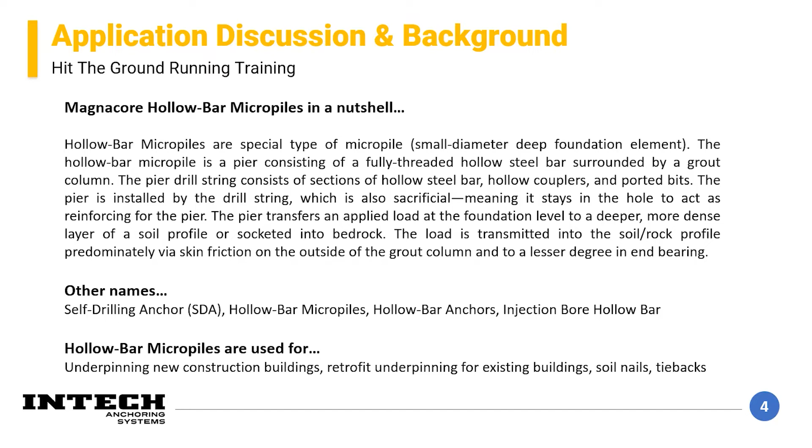The thing that is unique about hollow bar micropiles is the one-pass installation method, where the hollow steel tube used to drill the hole for the micropile is disconnected from the drill string and remains in place as the element reinforcement. Other names for hollow bar micropiles are self-drilling anchor, injection bore hollow bar, and hollow bar anchors.

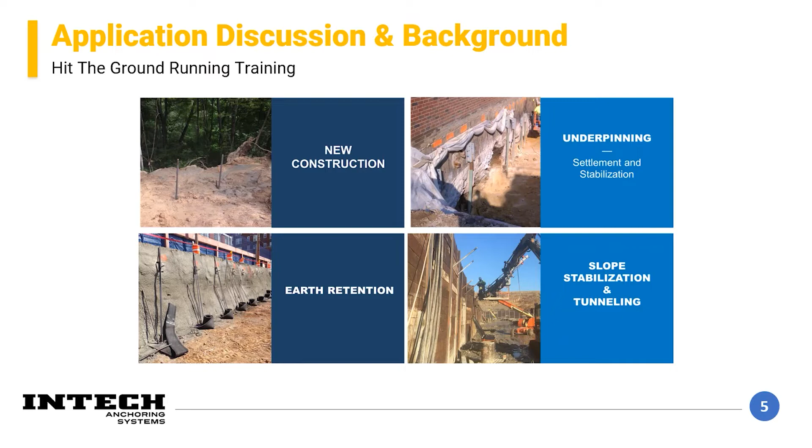Hollow bar is used in a number of applications such as new construction, retrofit, earth retention and slope stabilization, and tunneling. Some of the biggest advantages of using hollow bar in a project are when there are difficult soil conditions like collapsible soils that don't allow for open hole drilling.

This is because the method of installation is able to maintain a grout head which resists hole collapse. An additional benefit of the system is the ability to hammer the drill string through tough cobbles and gravels, and it's even able to penetrate to create a rock socket into bedrock.

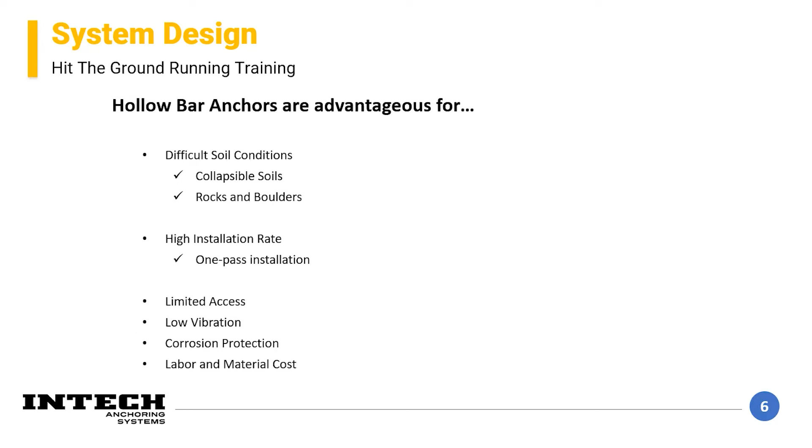Finally, the system is relatively low vibration, has options for limited access, and is able to have galvanization and other methods of corrosion protection applied. The final benefit of the system is the labor and material cost.

This is compared to a conventional micropile installation. There are several methods of micropile installation that exist, a few of which include advancing casing ahead of the hammer to keep the pile cavity from collapsing.

In these scenarios, you advance the casing, drill a little bit, add more casing, drill a little bit more, and so on until you get to the end of the hole. So it takes quite a bit of time, effort, and labor to install a conventional micropile with this method.

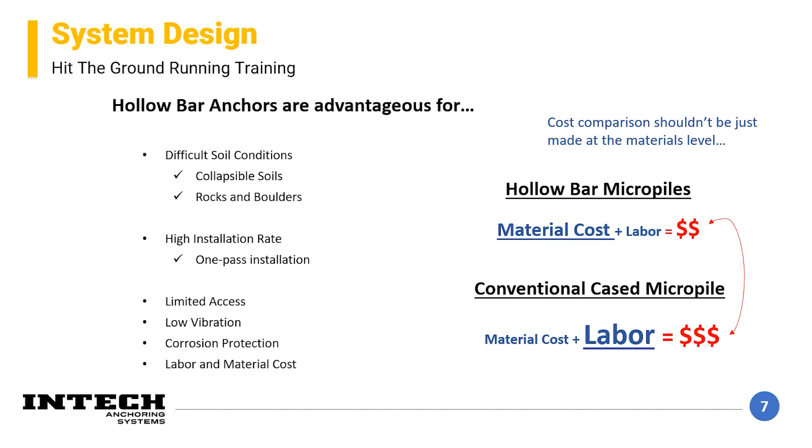Whereas for our method of hollow bar installation, the material for reinforcing costs a little bit more, but the savings can be realized in the significantly less labor required to get it installed. The one-pass method is significantly faster, allowing for more piles being installed on a site.

System components and options. This is a breakdown of the individual pieces of a finished hollow bar micropile element. The first breakout includes the hex nuts and termination plate, the final injection grout, coupler, and drill bit.

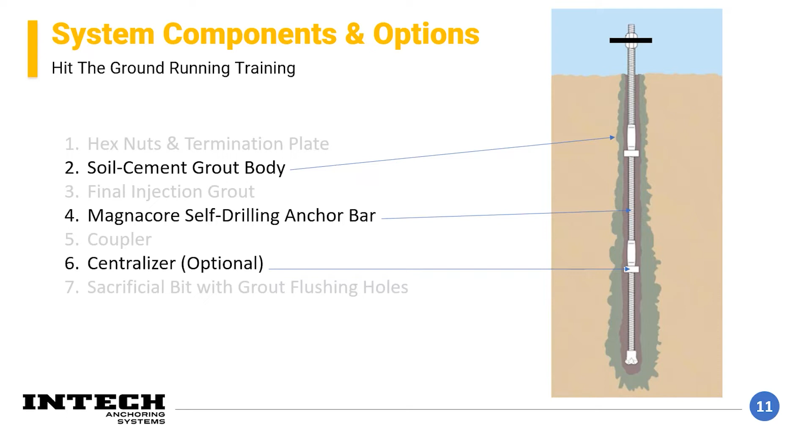The second breakout includes the soil cement grout body, the hollow bar tube sections, and centralizers which hold the bar in the center of the cavity.

So a little bit more about the bar. The bar is continuously threaded steel tube. The threads are typically left-handed threaded. The bar is usually shipped in 3-meter sections, but this can be cut into smaller sections for low headroom type installation. MagnaCore is regularly tested for the cross-sectional area, thickness, tensile strength, and yield strength.

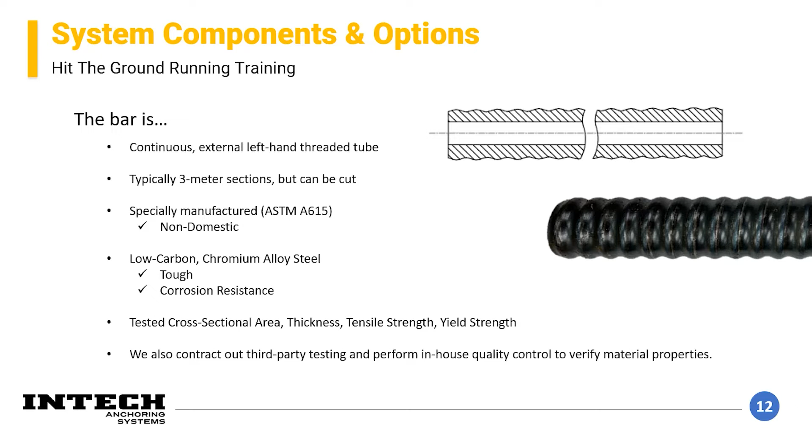We also contract out third-party testing to make sure that what you get on site is good or better than what you order. There are typically two styles of hollow bar, namely T-thread and R-thread. R-thread stands for rope thread, and T-thread stands for trapezoidal thread. These designations describe the outer profile of the thread.

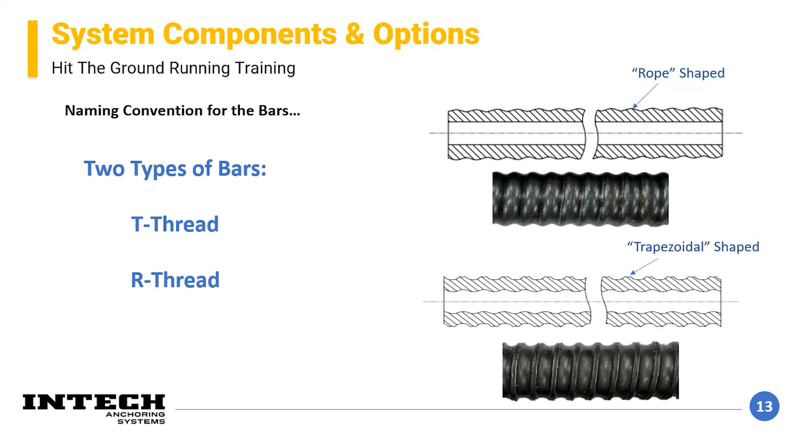So this is how the naming convention breaks down. For example, for the name R32S, it has 3 parts. The first part is the letter designation of the bar, so rope or trapezoidal thread. It will have either a T or an R here.

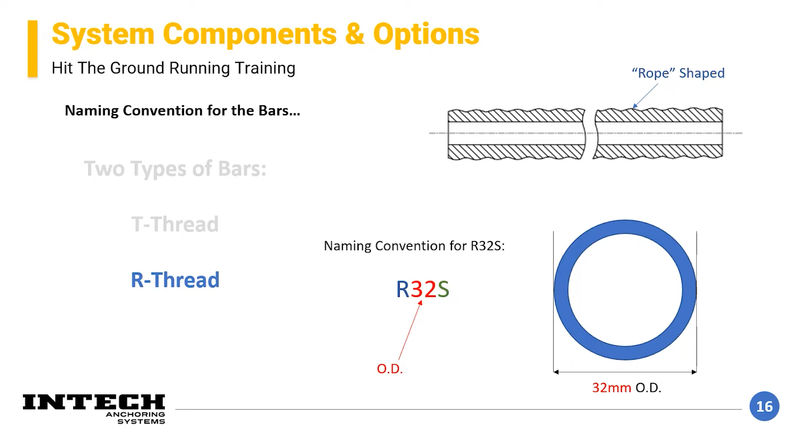The second part of the name will be the outside diameter of the bar in millimeters, so in this case it is a 32 millimeter outside diameter bar. The third part is the hole modifier, which refers to the hole size. The R-thread naming conventions we currently carry are R32, R38, and R51.

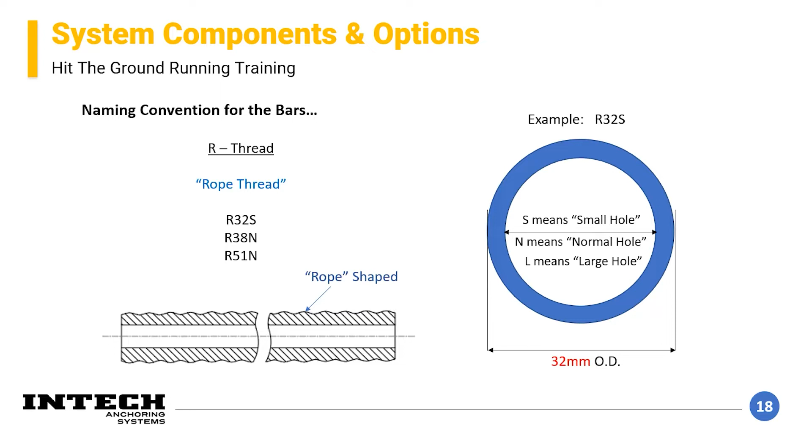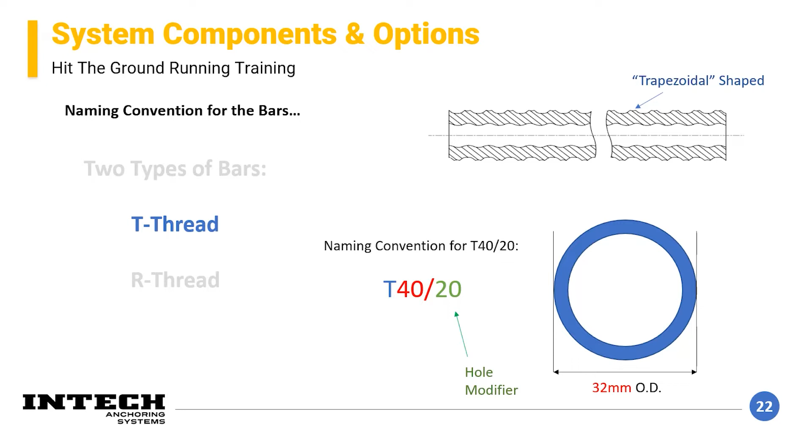In this case, it's a 20 millimeter inside diameter. These are the current variations of T-thread bar we currently carry. Note the hole modifier for this style is denoted as the inside diameter of the hole.

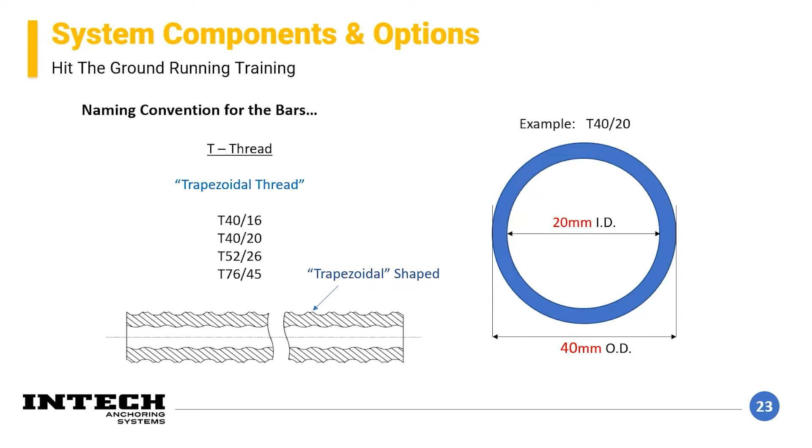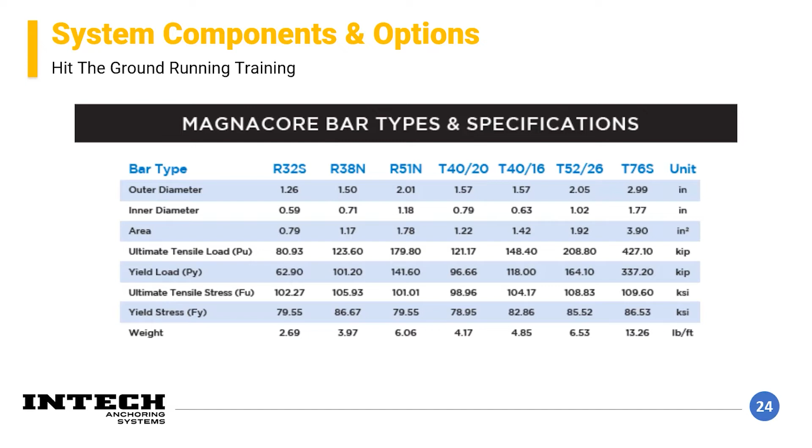At the end of the day, it is most important to consider the specific engineering properties of the bars from the specific supplier you are getting them from. We generally have the strongest bars in each line in the market, so make sure you consider a smaller bar size compared to our competitors. For instance, it is not uncommon that our R38 bar can outperform T40 bars from other suppliers.

So the next component we're going to talk about is the couplers. These are internally threaded sections of tube that connect consecutive sections of bar. There are also gaskets on the inside that engage with the end of the bar to seal the internal hollow section of the coupler. This is to keep the grout fluids from going between the threads and squirting onto the installation crew during pile advancement.

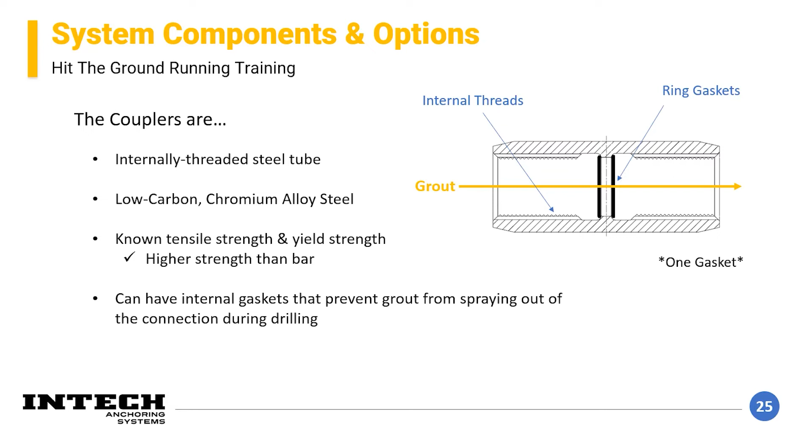The coupler sections are designed and tested to verify they are higher strength than the bar itself. The third component to go over is the bit. The bits are heavy steel components that get threaded onto the end of the bar. There are multiple styles of bits that can be selected based on the anticipated soil conditions.

The first one at the top is the button bit. This bit is good for pulverizing bedrock for rock sockets of substantial length. The second style that we typically carry is the crosscut bit, which is good for dense or stiff profiles and even some moderate rock socket lengths.

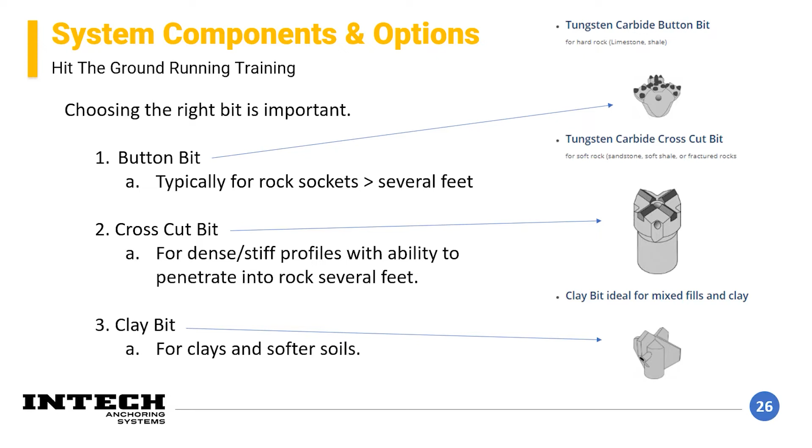The last style we carry is the clay bit, which is good for clays and softer soils that don't have gravels or sands. There are other types of options that we can obtain, so if there's a specific style that you're familiar with that you would prefer, please feel free to let us know.

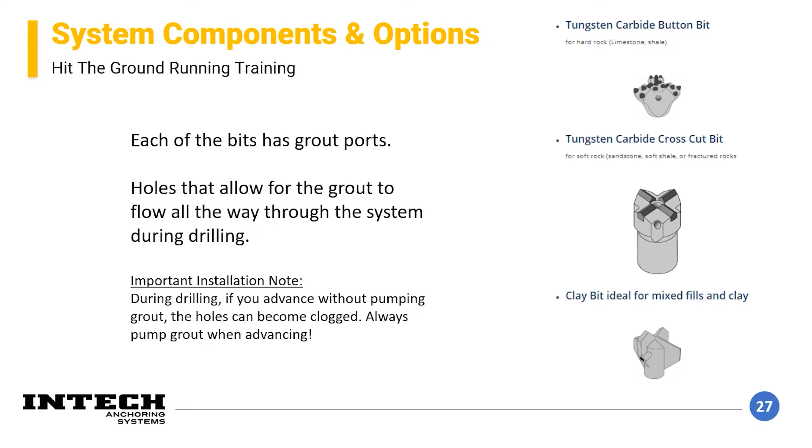It is important to understand that each of the styles of bit have ports to allow for grout to flow through them. This is an important key to installation, that you always have to be flowing fluid through the bit during advancement, otherwise the bit can plug up. Always remember to flow before you go.

The termination assembly consists of a few pieces and is the last component we're going to discuss. It consists of a bearing plate with a hole and a few hex nuts. These plates are designed to be large enough to structurally transfer the project loads with the pile cap. Once the design length of the pile has been achieved, the nuts and plates are assembled and any excess bars cut off. This assembly is then typically cast into a footing or pile cap.

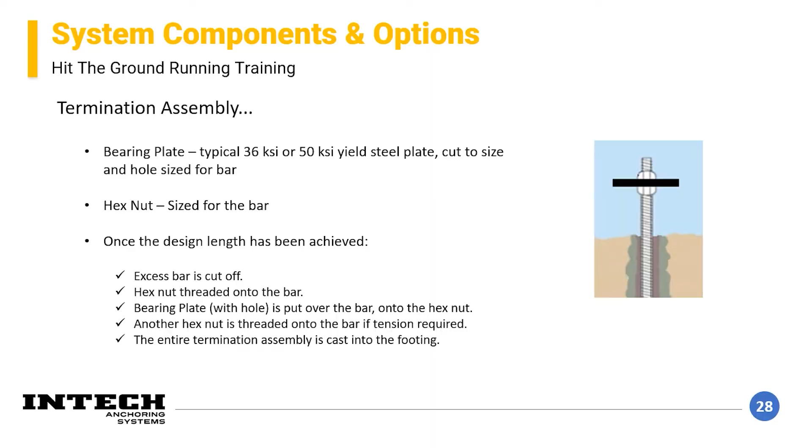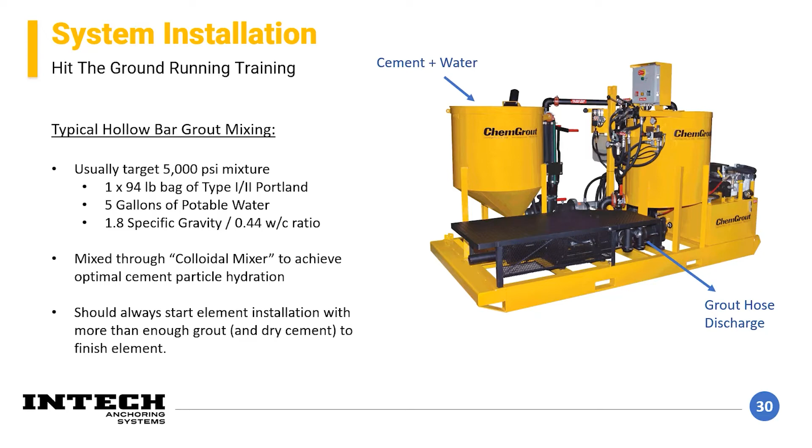System installation. Another necessary component for system installation is a grout plant. This system takes cement particles and water, combines them very intensely using the colloidal mixer, and pumps the grout through the system all the way down to the bit. An important key is to make sure that you always have enough cement to finish an element. You don't want to be going to the store for extra cement with wet grout in the tanks.

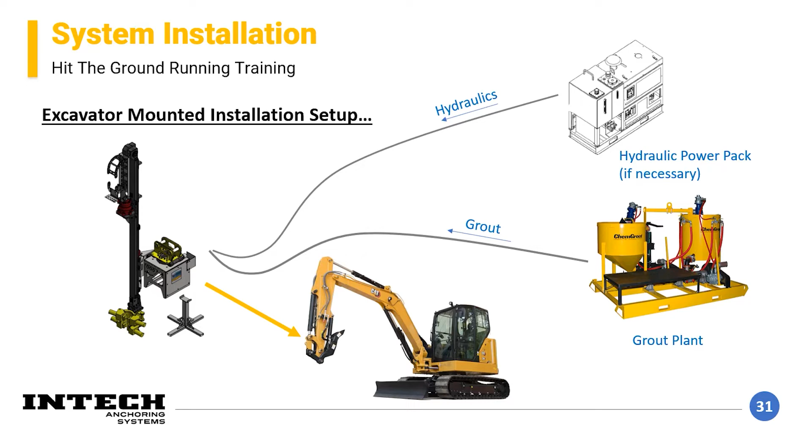As an overview of the system setup, I wanted to show this diagram of the moving pieces in the system. This slide specifically demonstrates how the pieces go together for an excavator-mounted installation setup. The drill runs off of hydraulics, so it can either be run off the excavator if the excavator has sufficient pressure and flow to meet the needs of the drill. Otherwise, an external power pack can be used as a supplement to smaller equipment or equipment that doesn't have hydraulics capabilities.

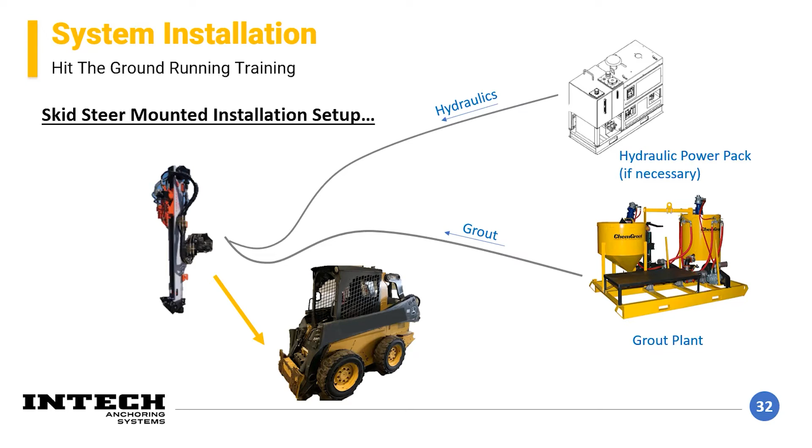The second setup is for a skid steer mounted setup. Similar to before, these can be run off smaller pieces of equipment, but if you need extra pressure and flow, a hydraulic power pack can also be used. And finally, we also have a man-portable drill system that can be moved by hand. There are some limits to the bar this one can install, and the specific drill specs should be checked.

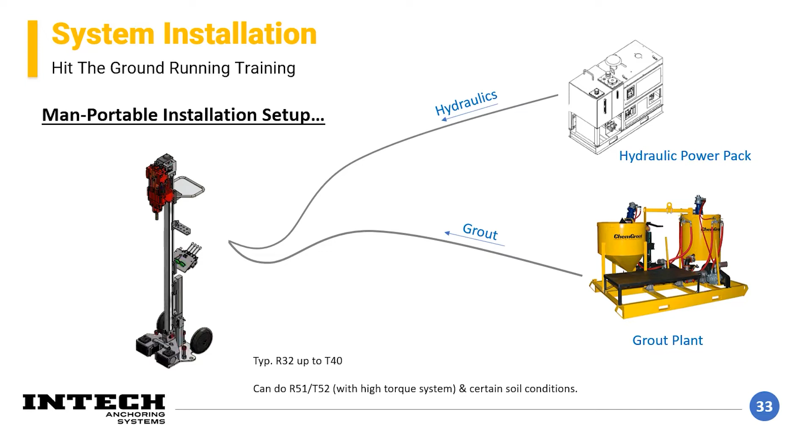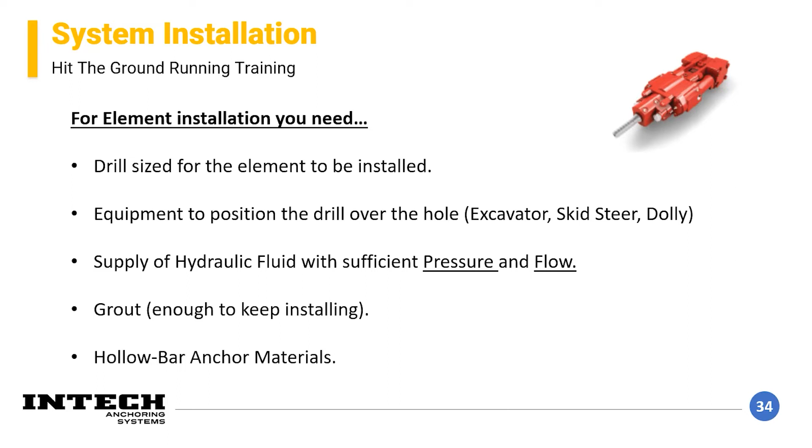This is a breakdown of everything you'd need for element installation. You need a drill size for the element to be installed, equipment to position the drill over the hole such as an excavator, skid steer, or dolly, a supply of hydraulic fluid with sufficient pressure and flow, grout, and hollow bar anchor materials. There are a few major components that are included on each drill that should be noted.

The first is the place the grout goes through the drill. Ultimately, the grout will need to go through the hollow tube of the hollow bar, so the grout hose will connect to the drill in some place that allows it to flow out of the striker bar.

The second item are the grease ports that allow for lubrication of the drill. The third item is the striker bar, which allows the drill to connect to the hollow bar.

You can either use a shank that has the thread pattern of the bar you are installing, or use an adapter. It should be noted that using an adapter for a hole size that is very large compared to the bar can lead to issues during installation.

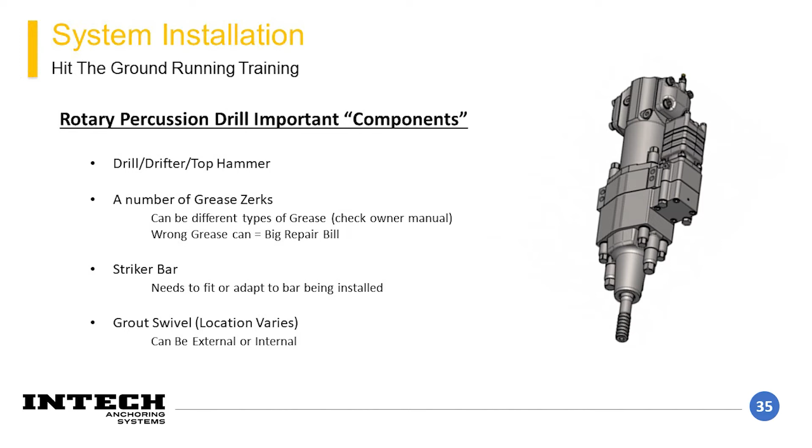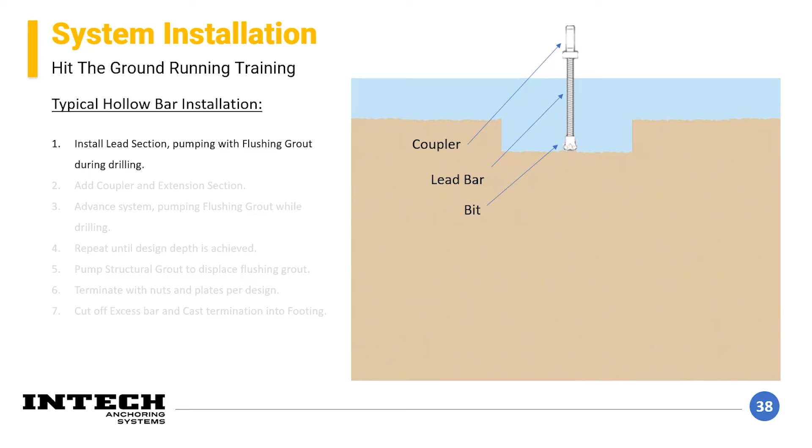These slides will demonstrate the general steps for element installation. The first step is to install the lead section, which consists of a bit, the first section of bar, and a coupler to attach to the drill. For clarity, I have omitted the drill above.

So the first step to advancing is to start pumping grout. While you're pumping grout, you apply crowd and torque. It is also possible to use a thinner grout than the design mix.

We call this the flushing grout. It can go as thin as water, but less cement results in less fluid density, which can cause hole collapse. We will also have to displace this grout at the end of the element installation.

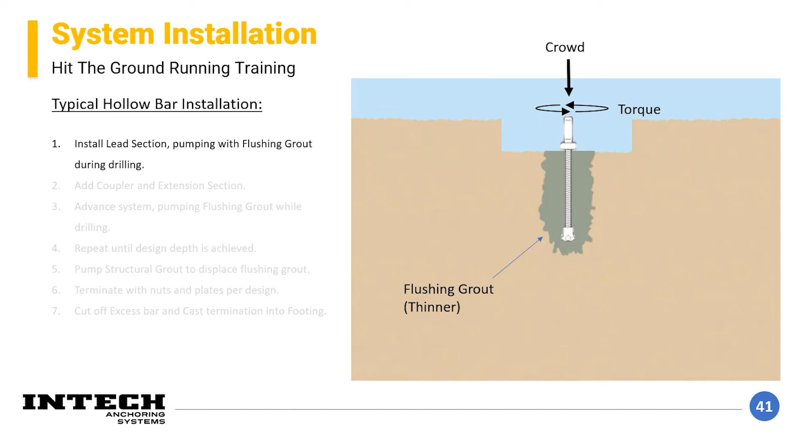So when you're drilling, someone should always be looking to verify that grout is flowing out of the hole. If there's no grout return, it's important to assess the reason.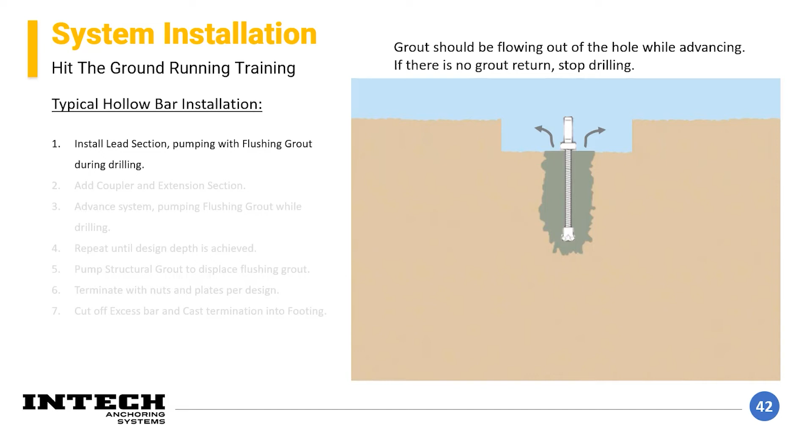Another thing to note, the hole created by the system is taken to be the diameter of the bit. Since we're pumping under pressure, the grout flows into the void space of the soils. This is especially advantageous in sands and results in much higher engagement with the soils.

After each section of bar is advanced nearly all the way into the ground, it is good practice to plunge the hole 3 to 5 times. We've been on projects where the contractor didn't do this, and it resulted in poor pile performance.

So after you're done plunging, you can disconnect the coupler and add another bar section. You can then advance the system, making sure to pump grout before advancing the steel.

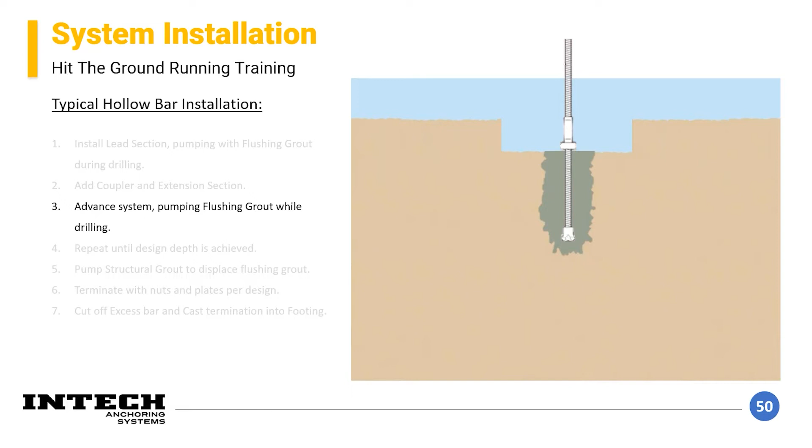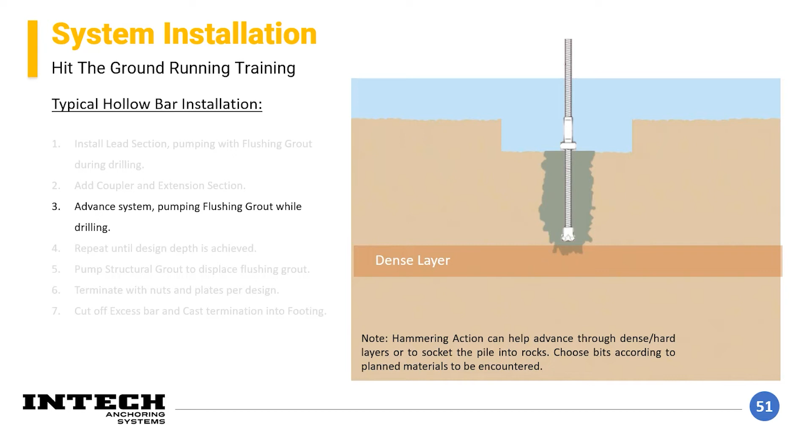Another feature of hollow bar drills is they're able to apply a hammering action. This action can help penetrate dense, cobbly, gravelly soils, and also penetrate into bedrock. The vibration helps advance the pile through this dense layer.

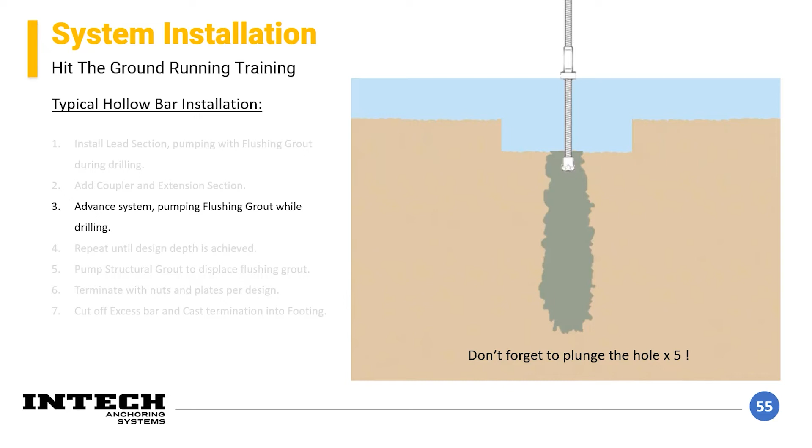Also, don't forget to plunge the hole. So now you just repeat this process until your design depth is achieved.

At this point, we'll say that we achieved our design depth. The hole that has been created is full of thinner flushing grout, so it is necessary to displace this material with structural grout. If the hole was drilled with structural grout the entire way, this step isn't necessary.

You can see here the structural grout has filled in the cavity of the hole, which is the diameter of the bit. At this point, it is necessary to plunge the hole just as before.

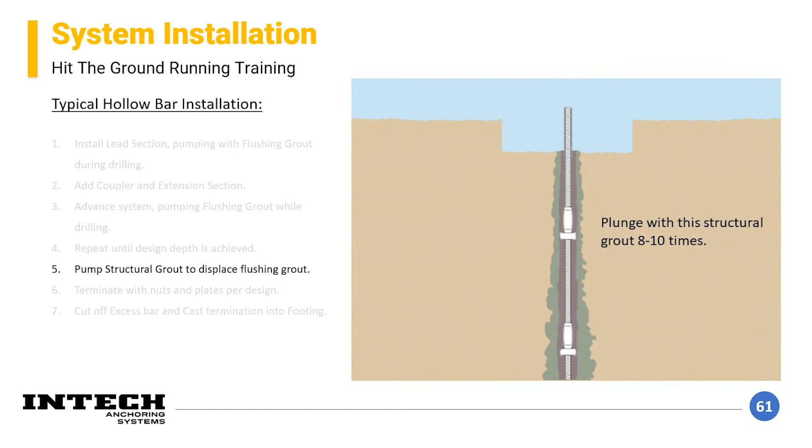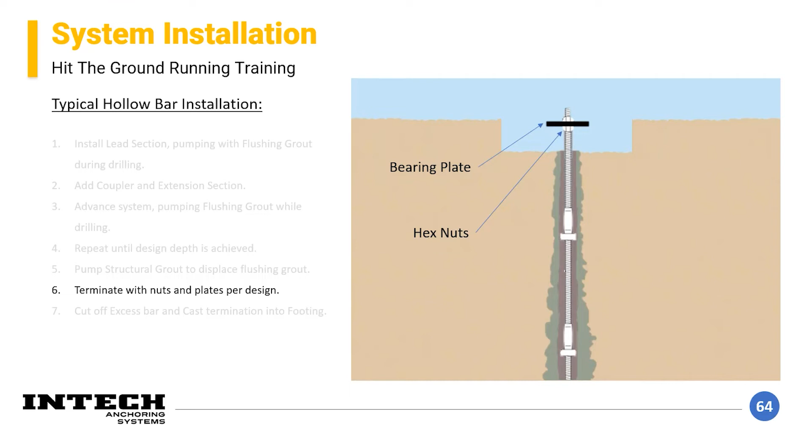Now add the termination components per the design. The designer of the pile cap will designate the elevation the plate should be at. The nut should allow for ease of adjustability of the plate. Finally, the termination gets cast into the pile cap.

So with geostructural solutions, there's a few things to consider. First, I'll go through the major principles for the geotechnical capacity. The geotechnical capacity is comprised of two things: the skin friction and end bearing.

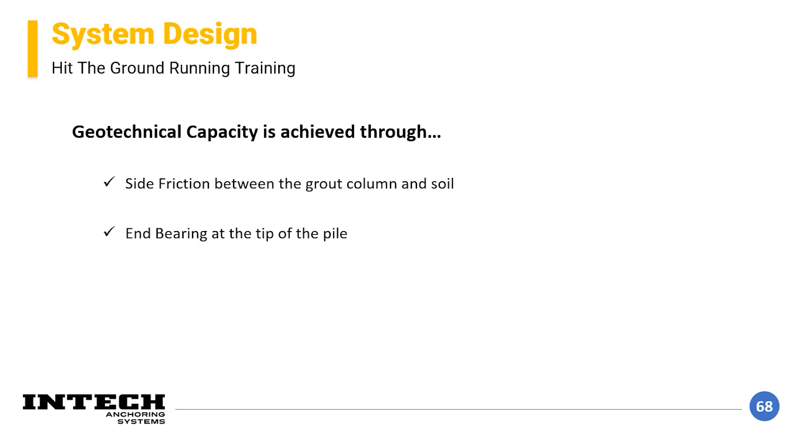The skin friction, or side friction, is generally taken to be the surface area of the sides of the grout column diameter. So we would take this area, which is a function of the diameter of the bit, and multiply that by the bond strength.

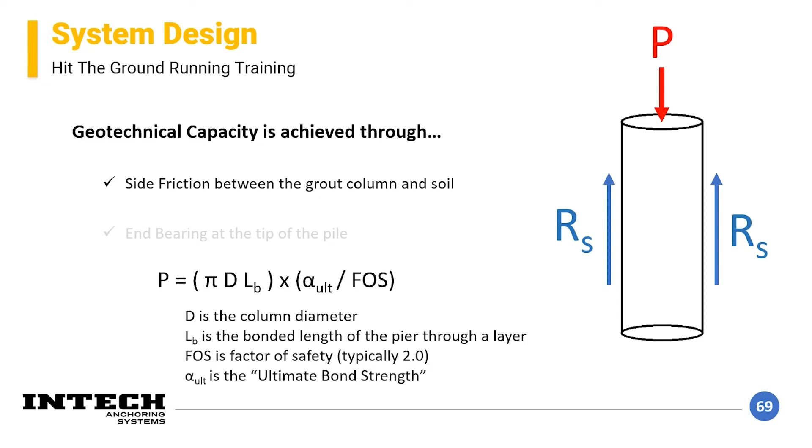There's also a factor of safety applied to this bond strength, so it can be compared to a design load. This area times the strength results in a resisting load capacity.

So with geotechnical systems, there are typically a few layers of soils and/or rock. Each of these layers has a section of cylindrical area that passes through them.

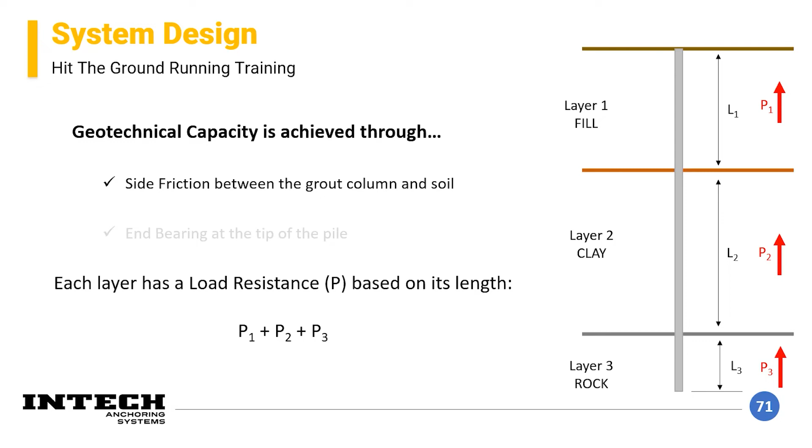It is intuitive that the density or stiffness of various soils results in varying amounts of resistance friction. For example, a soft clay probably won't resist a load as much as intact limestone. So with that friction resistance equation before, and knowing how much cylinder passes through each zone, we can calculate how much skin friction capacity can be counted on for each layer.

An important note, there is typically a length we disregard at the top for undocumented fills, active zones for wet and dry conditions, and other cases of soils that shouldn't be counted on for resistance. The design methodologies listed before typically have a more in-depth description of what to use for an unbonded length.

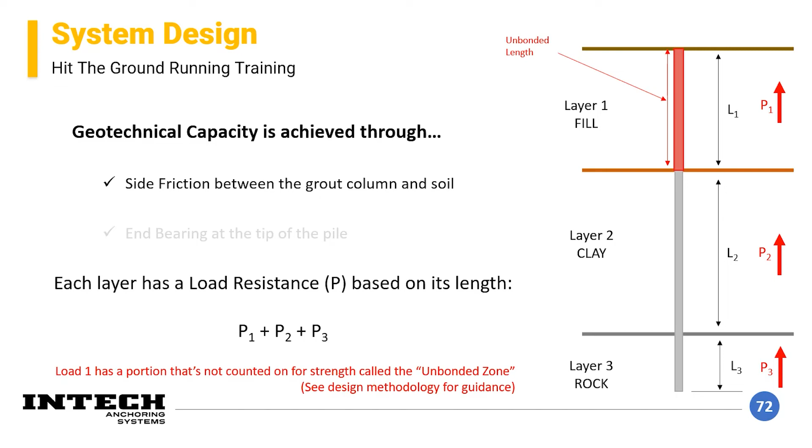So the check we do on the system is to determine if the capacities of each layer are greater than the applied load. If there is more capacity than load, the system is okay. If there is not enough resistance, the length of the pile or the diameter should be increased, or even the number of piers can be increased to decrease the total amount of load on each element in a system.

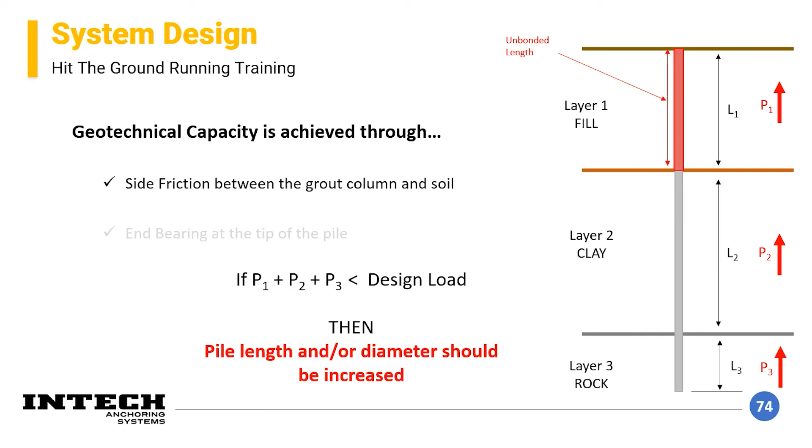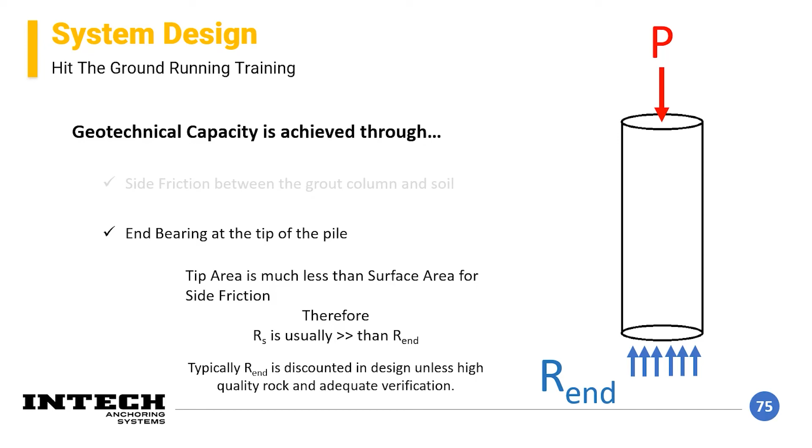So another type of geotechnical capacity that can be used is the end-bearing capacity. However, as these elements are relatively narrow in the context of geotechnical engineering, this is typically disregarded unless it is in bedrock, and the bedrock is quality rock that has been cored and tested.

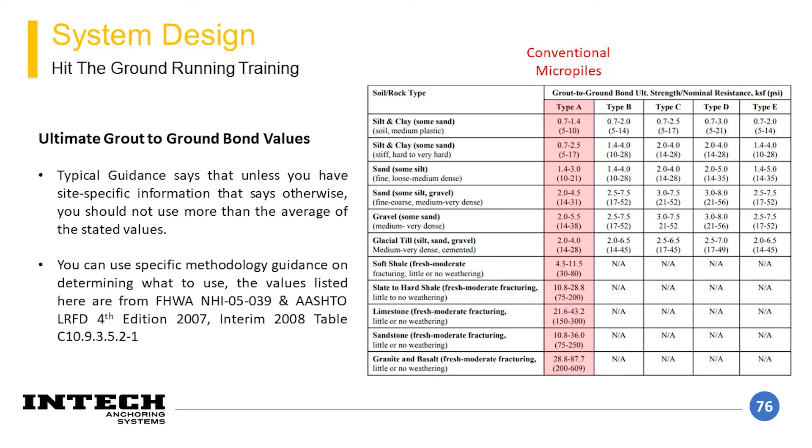These values are what we typically use for the ultimate grout-to-ground bond for the soil. A conventional gravity grout system is type A. A hollow bar system, type E, can be seen to achieve higher values of bond strength based on being installed with pressurized grout.

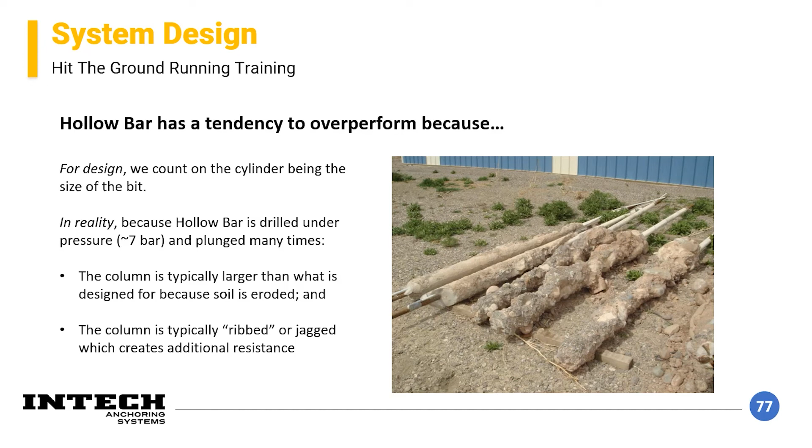As you can see here, on the left are some elements that were installed as solid bar. These elements are smooth-sided. Then the next 3 on the right are hollow bar elements. Based on the pressurized grout and plunging, it creates a very ribbed profile of the grout, which allows for more surface area. In this manner, our elements typically perform better than what we initially design.

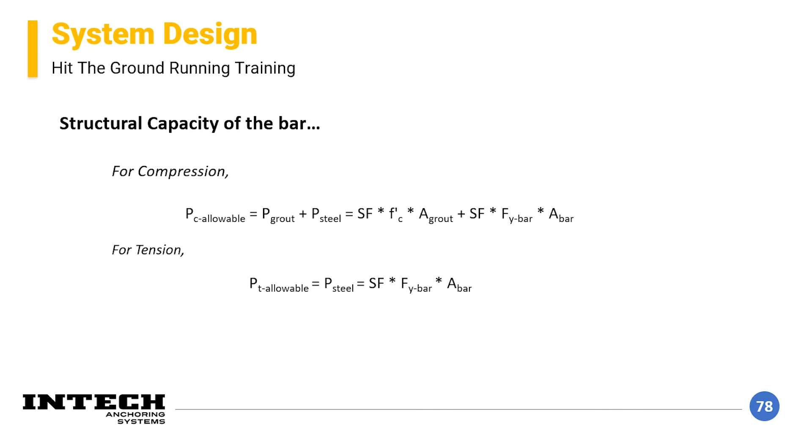So these sets of equations represent the structural checks we do for an applied load. These checks are compression and tension. As you can see, for a compression load, the capacity is shared by both the grout and the steel. For tension, however, the only term that is used for supporting the loads is the steel, so the steel is the limiting component for structural support in tension. This is because concrete doesn't do very well in tension.

And if any microcracks were to form, the grout would become disengaged at that point. The only thing transferring the loads is the steel.

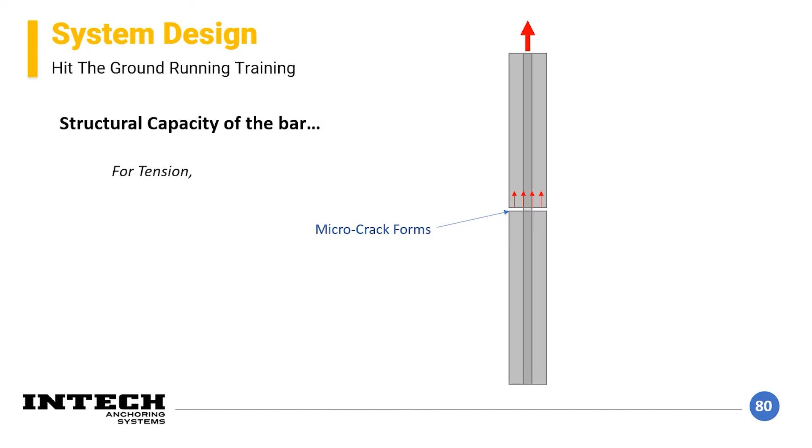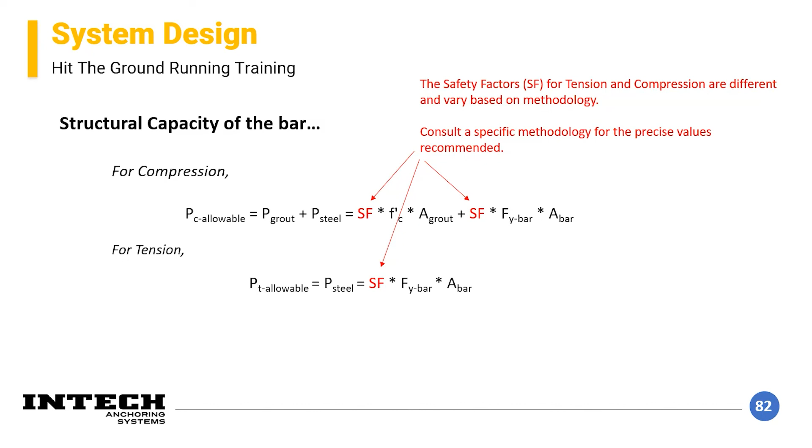So these equations are relatively simple, but have a few nuances. The safety factors are different from one another, and there are different factors to use based on the methodology you choose to use for design.

Another key principle is related to strain compatibility. We could use really high yield strength of the bar, however, the grout will likely fail at the strain required to fully engage the steel yield strength. For that reason, per AASHTO, we usually use a reduced yield strength of the bar.

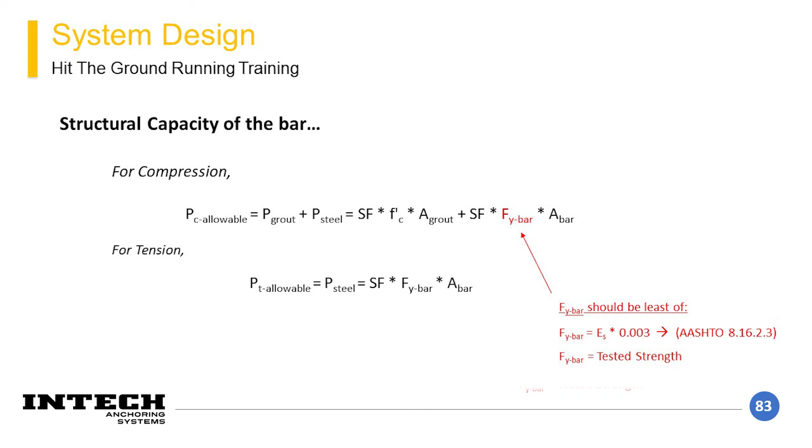The only way to check these elements is with a load test. Typically, as long as end bearing is disregarded in the element design, it is typically possible to test these elements in either compression or tension. This is up to the discretion of those involved in the project, though.

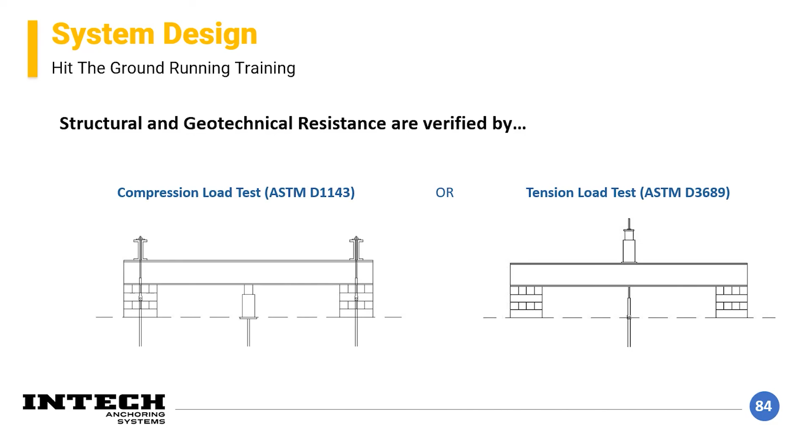Main takeaways. Here's a breakdown of the main takeaways for hollow bar anchors.

Hollow bar anchors can be used in new construction, retrofit, and active and passive lateral support. They are a great alternative in collapsible soil profiles compared to conventional micropiles that require casing. The labor savings of installation typically offsets material costs that would be required for a conventional micropile that requires casing.

The hollow bar components are typically comprised of hollow bar sections. The system components are typically comprised of the thread bar, couplers, bits, and termination. There are generally 2 styles of hollow bar, rope and trapezoidal thread.

For system installation, a lead section is started with a bit and is advanced, adding couplers and extensions as necessary to achieve a design length. There should be constant grout flow and return of grout out of the hole during installation. Between each extension and upon pile completion, you should plunge the hole 3 to 5 times and even up to 10 times at the end before terminating the pile.

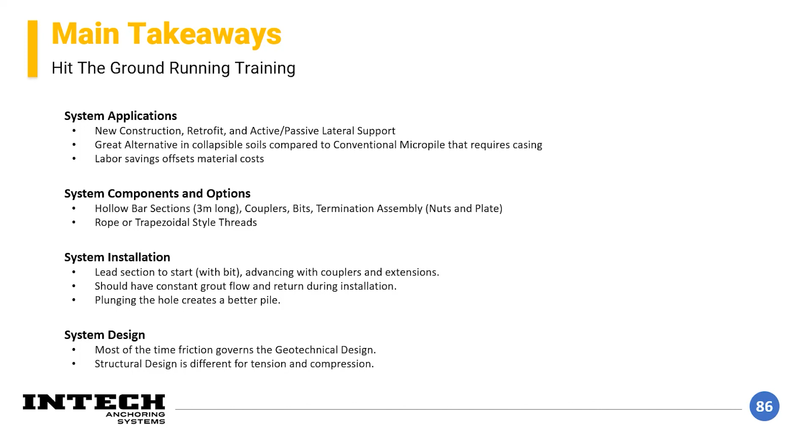For system design, most of the time friction governs the geotechnical design. Structural design is different for tension and compression.